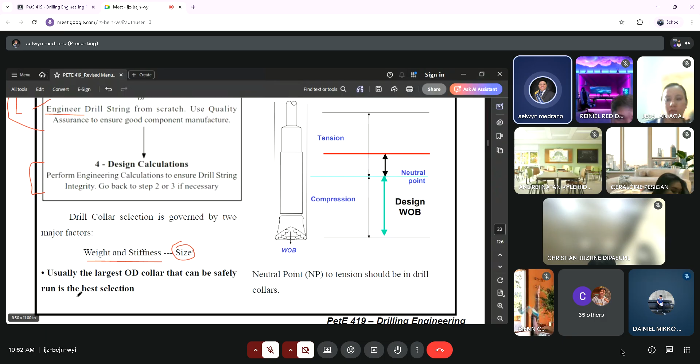So drill collar selection daw po is governed by two major factors. However, you will see here it's three. Tatlo siya, but weight and stiffness are somehow associated with one another. Then the other one is the size. So usually, the largest outside diameter collar that can be safely run is the best selection. So yung pinakamalaki na possible. Kasi there would be more available weight on bit. So mas mataas yung weight on bit, mas mataas yung ina-exert na force due to gravitational pull. So mas mataas yung ma-expect nating rate of penetration.

So we will be expecting lesser energy output from the equipment, kasi napoprovide na yung force or energy na kailangan natin para mag-penetrate yung ating bit by the weight na pinaprovide ng ating drill collar.

Siyempre, pag taas ng diameter, at most cases, tataas din yung thickness niya or mas makapal yung thickness. Mas makapal yung body ng mismong drill collar. Tendency, mas mabigat, kasi it's composed of more materials. And also, greater stiffness to resist buckling and smooth directional tendency. Also, cyclical movement is restricted due to tighter clearances.

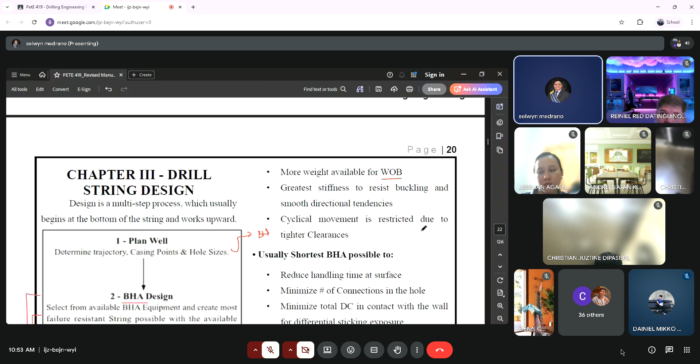Usually, when we use the shortest BHA possible, yung nangyayari is there would be a reduced handling time at the surface. Also, nami-minimize din yung number of connections sa hole, as well as the minimized number of the total drill collar in contact with the wall. So technically nababawasan natin yung tendency ng differential sticking, since mababawasan yung total number of drill collar natin. Okay? Gets po yun.

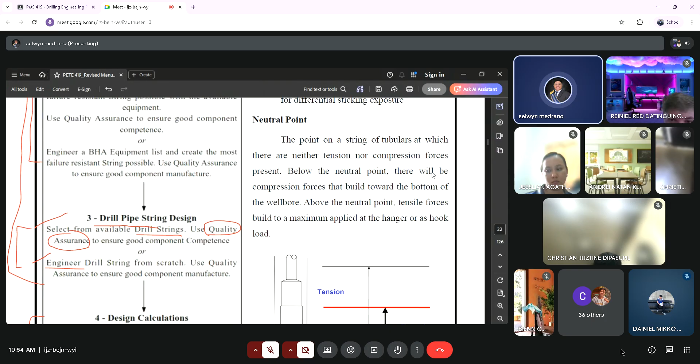Gets. Can we proceed now with the next concept to be discussed, which is the neutral point. Okay, for the neutral point, by definition, the neutral point is the point on a string of tubulars at which there are neither tension nor compression forces. So if we are to look at this figure, as you can see, this is our BHA, as a part of the drill string.

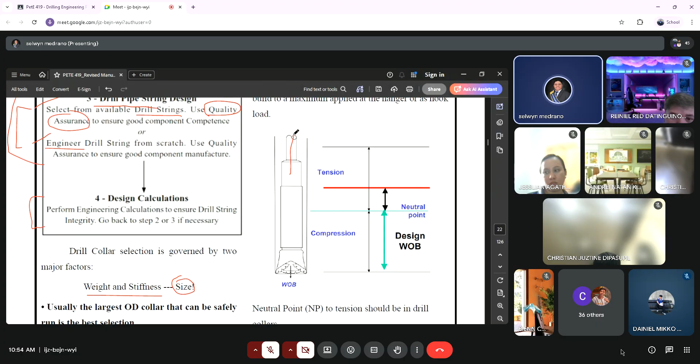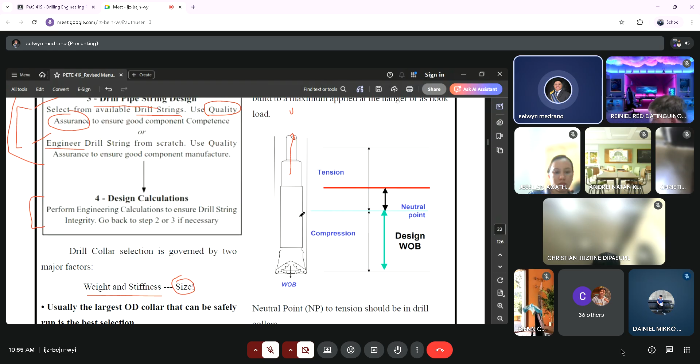Normally yung tension po is nararanasan siya dito sa upper part kasi naka-hook siya doon sa top drive. So, ang tendency, there would be a tensile force or yung tension natin. Then, yung compression, it will be caused by the gravitational pull or yung weight ng ating whole assembly. So, ang tendency, there would be a point between the tension and the compression wherein neither is present.

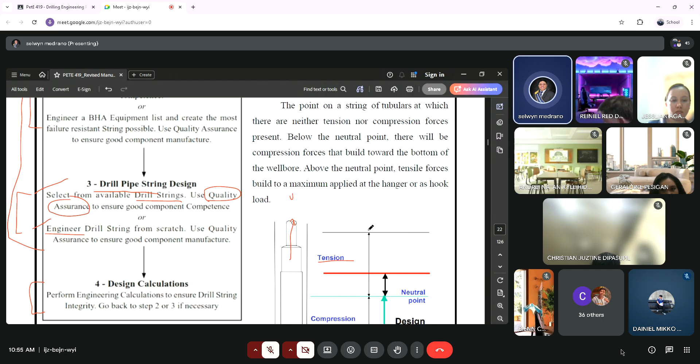Walang tension, walang compression. So in terms of the value of forces, it is 0. So at equilibrium siya. Pero yung term natin for this one, sa drill string, is neutral point.

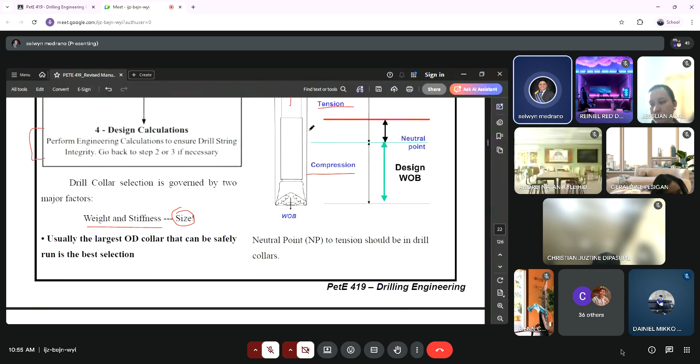So we have two types of neutral point. We have the neutral point of tension and compression, yun yung mas general na sinasabi natin kanina, and we have the neutral point of bending. So if NPTC is pertaining to the point within a tube where the sum of the axial forces is equal to 0, ang neutral point of bending naman is pertaining to the sum of moments. Sa halip na axial force, this is pertaining to moments. So same lang na at equilibrium or at 0.

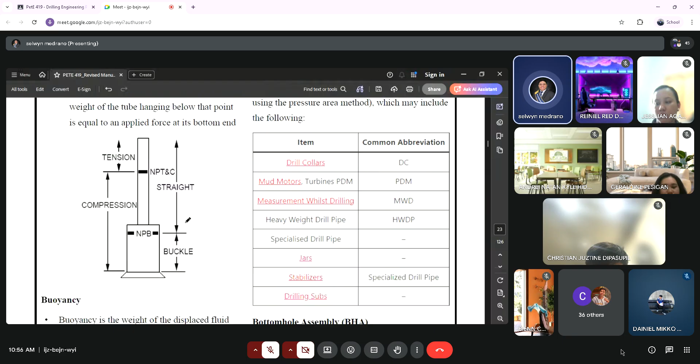Gets po yung difference ng NPB at NPTC? Gets? Okay. Ito yung itsura niya. It's more of the straight section which experiences the straight applied force, and where the section buckles up. Doon nagkakaroon ng bending sa gitna or between those two. So, technically, NPB is somewhere between the straight section and the buckled section.

Okay. So, next we will be dealing with buoyancy. I think you have already encountered this during your drilling technology last year, yung buoyancy as a concept in drilling. So, buoyancy, by general definition, is the weight of the displaced fluid. Buoyancy is usually accounted for via BF or the buoyancy factor. This is for the case of buoyancy as a concept under drilling engineering.

In the setup of a borehole, buoyancy is creating a hydrostatic effect. Pag sabi hydrostatic effect, it's more of hydrostatic pressure, knowing that pressure is force over area. So technically, nagkakaroon tayo ng hydrostatic effect kasi there is a presence of drilling mud along with our drill string. So the hydrostatic effect is due to the presence of mud.

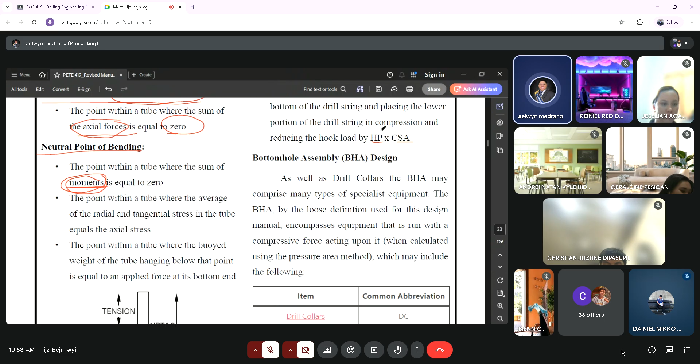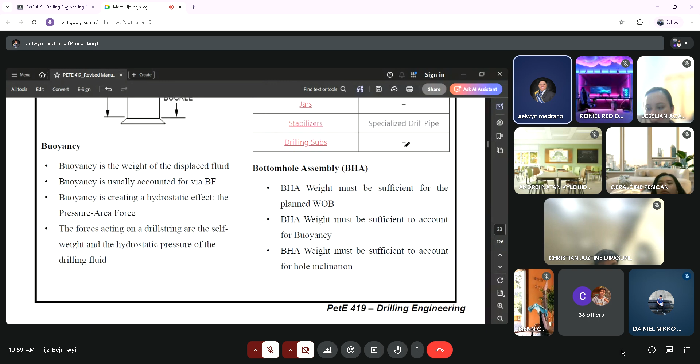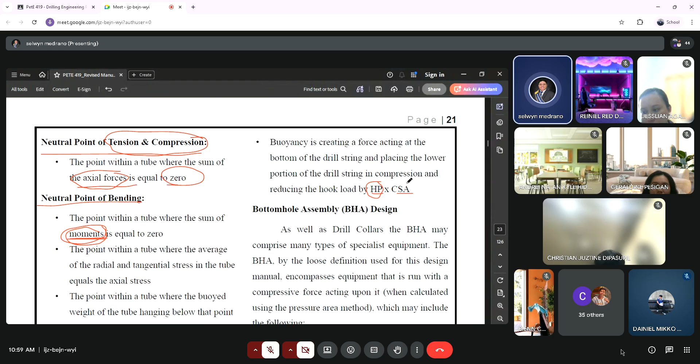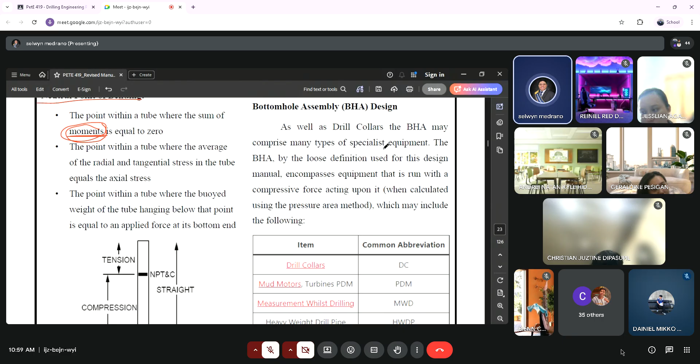For BHA design or bottom hole assembly design, let's first identify the equipments or components of a BHA. So we have here this list of items.

You have the drill collar, abbreviated as DC, the mud motor, which is PDM, pertaining to positive displacement mud motor. Then MWD, or measurement while drilling.

HWDP, or the heavyweight drill pipe. We also have the specialized drill pipe, though there is no specific common abbreviation for such.

Then we also have the stabilizer. From the term stabilizer, it stabilizes the drill string to the point that it won't stick or have contact with our borehole wall or casing. Because the tendency is there could be a differential in pressure between the two surfaces, and once there is a large difference in pressure, the tendency is for the two to stick together. To achieve equilibrium, we need equivalent pressures at both surfaces.

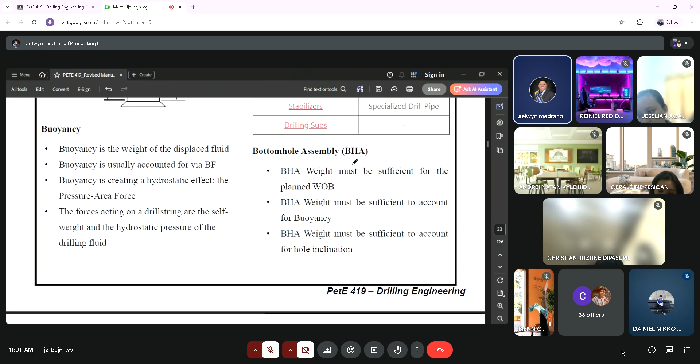Next, we have the BHA. For the BHA weight, it must be sufficient for the planned weight on bit. So what do we call weight on bit? That's the expected weight we want the bit to exert in order for it to achieve a specific value of rate of penetration. This means we quantify the rate of penetration earlier in planning, before we apply weight on bit, because our design is based on the expected weight on bit that our drill string will exert.

BHA weight must also be sufficient to account for buoyancy, because it shouldn't float in the drilling mud. If it floats, the tendency is it cannot drill properly, it won't continuously penetrate the formation.

BHA weight must also be sufficient to account for the hole inclination. So if our well is deviated, our BHA must be accounted for. This is where calculations come in that will be used in Chapter 5 on directional drilling, dealing with BHA accounting for hole inclination since that's about directional drilling or inclination of the well.

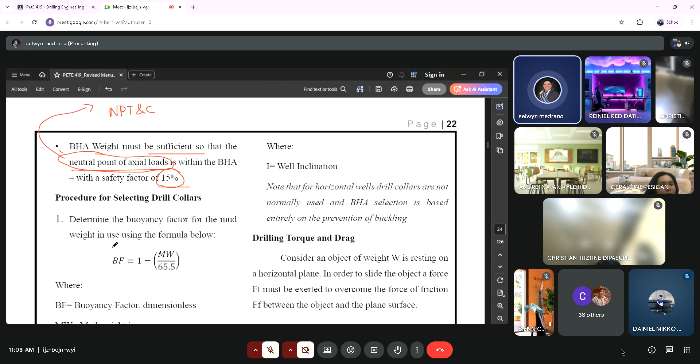So for the procedure of selecting drill collars, first we need to identify or quantify the value of the buoyancy factor. Buoyancy factor is given by this formula, and it's determined only by one parameter, specifically our mud weight, which must be in ppg, or pounds per gallon.

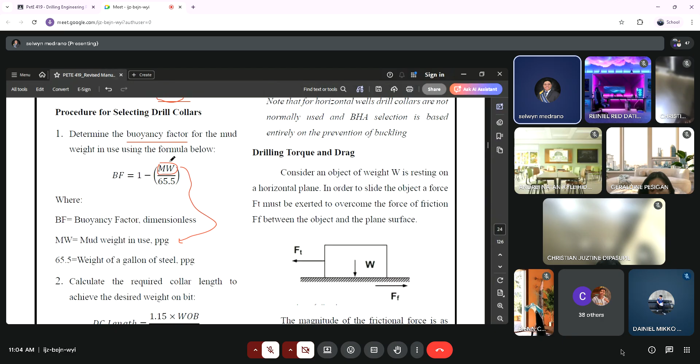There is an equalizing factor, not exactly a conversion factor, wherein we use the weight of a gallon of steel, which is 65.5 ppg, pounds per gallon. So our buoyancy factor value is normally less than 1. It won't be equal to 1, because if it equals 1, that would mean the mud weight is zero, meaning there's no weight being exerted by the mud, which is very impossible. So our buoyancy factor will always be less than 1.

Next is to calculate the required collar length to achieve the desired weight on bit. For that, we'll account for the 15% safety factor mentioned earlier, so we multiply by 1.15. For the drill collar length, the formula is the weight on bit all over the buoyancy factor times the weight of the drilling collar.

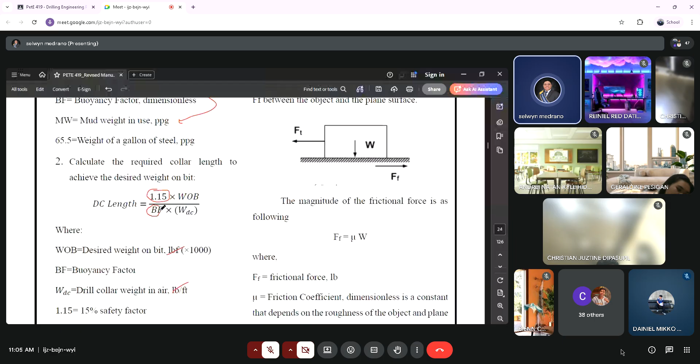This is the weight of the drill collar in air, expressed in pounds per foot. So in the numerator we have pound force, multiplied by 1,000, all over the denominator which is pound force per foot. By unit analysis, we'll end up with feet as our unit, since the pound force cancels out. The buoyancy factor is dimensionless, and the same goes for the constant 1.15 since that's just for the safety factor. So that's a simple calculation for the drill collar length.

However, in terms of a deviated well, of course there is an inclination to consider.

So nag-iiba yung length niya na expected natin. So we'll be accounting for the cosine of the inclination for that. So we have the DC length - this is the vertical length na compute po natin from here. Then we divide it by cosine inclination or the inclination cosine. Okay, so we'll have the length in deviated. So expected that the computed DC deviated length is greater than DC vertical length.

Kasi if the case is equal lang po sila, ibig sabihin vertical yung ating well. So if the case po, ulitin ko ha, if the case equal po ang DC vertical length at ang DC deviated well, technically it's not deviated. So vertical po siya. Kasi if the inclination is 0, ano ba ang cosine 0? Cosine 0 is 1. Makakancel lang siya. So technically equal siya. Walang inclination. So vertical lang po talaga yung ating well. Nakukuha po. Nakukuha ga. May kausap pa ba ako?

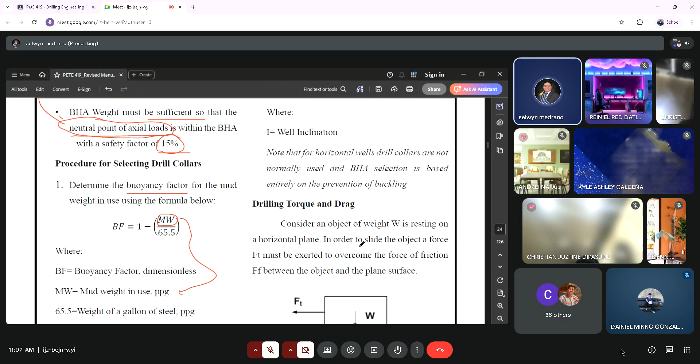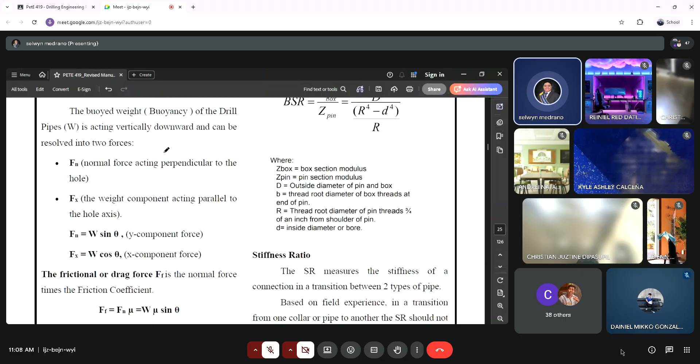Okay, so we proceed now with the drilling torque and drag. Actually, in terms of this, we'll be dealing with it on the directional drilling in chapter 5. So let's leave it there kasi this is more of an application siya sa deviated wells. So nag-iba kasi siya once there's an inclination. So we'll be focusing this as well as the drag force in chapter 5.

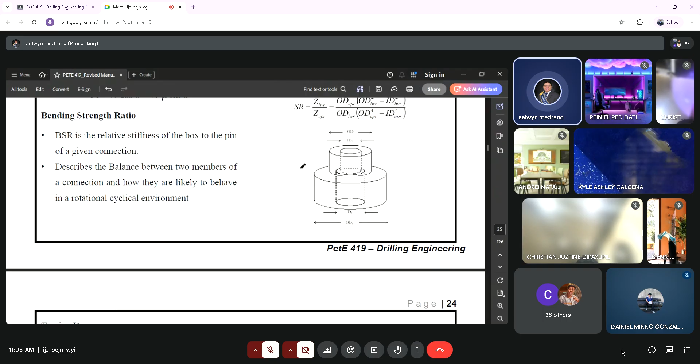Now, so let's focus here at the bending strength ratio or the BSR. So BSR or the bending strength ratio is the relative stiffness of the box to the pin of a given connection. So for a connection, we have two components na kinoconnect. We have the box and we have the pin. Pag sinabing box, that is the female thread form. Ang pin naman po, siya yung male thread form. So by the definition, you can already see the difference between the two.

So, di ba yung component niya is yung thread, alam niyo ba yung threaded form? Para siya yung sa part ng tornilyo at sa bolts and nuts. Yan, yung parang ganun yung tsura niya. Yung bolts, siya yung nagsisilbing male thread form. Yung nuts, siya yung nagsisilbing female thread form. Bolts and nuts. If tama, bolts and nuts. Ayan ba ang bolts? Yung pahaba ba? Yung pahaba ang bolts. Tapos yung nuts yung iniikot. So parang same lang yung analogy niya with the drill string.

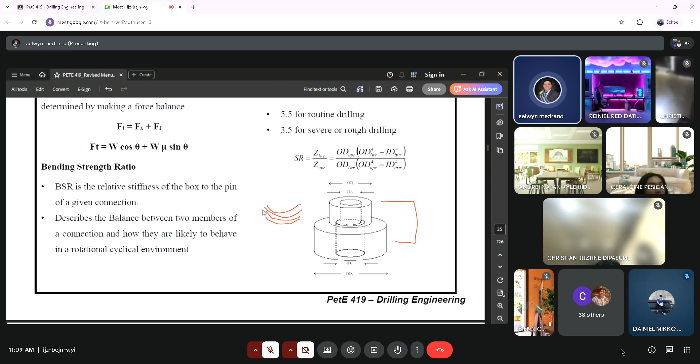D. No. So yung D natin is the outside diameter ng pin at box. So normally they are the same. B natin, in terms of this is the B, that's pertaining to the thread root diameter of the box threads at the end of the pin. Then R po natin, this R here, are the thread root diameter of pin threads 3/4 of an inch from shoulder of the pin. And D natin, ito, that is pertaining naman to our inside diameter or the bore.

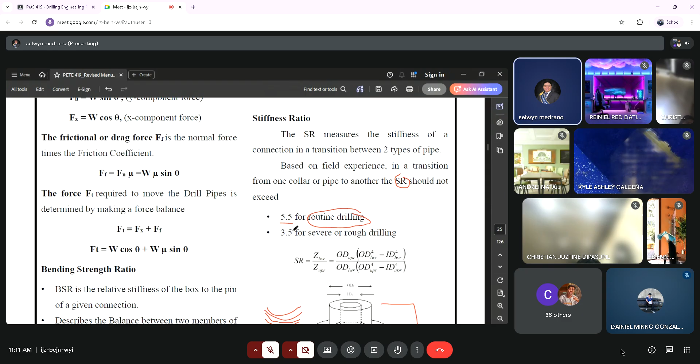Okay? Then along with the bending strength ratio, we also have the stiffness ratio. Now, so for the stiffness ratio, this could be a measure of the stiffness of a connection in a transition between two types of pipe. So based on the field experience in a transition from one type of pipe to another, the stiffness ratio should not exceed 5.5 if we are doing routine drilling, 3.5 naman for severe or rough drilling. Okay, so these are the limitations of the values. So this is based on field experiences. So technically, we have kumbaga live testimonies for such in terms of the possible values natin for the stiffness ratio.

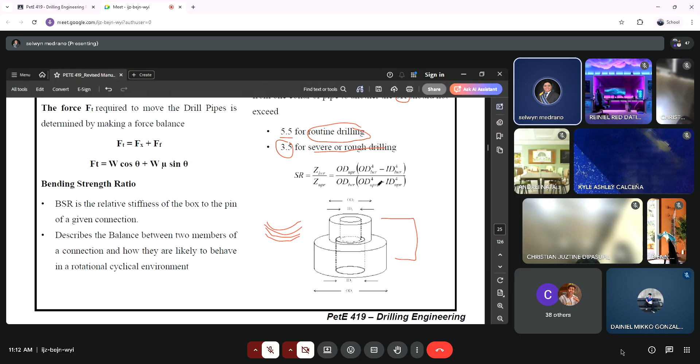So stiffness ratio daw po is computed as the Z of the lower, that's pertaining to the modulus ng lower section, all over the modulus of the upper section. Or it could be rewritten as the outside diameter of the upper multiplied to the difference ng fourth power for the lower outside diameter and the inside diameter of the lower section, all over OD ng lower section or the outside diameter ng lower section multiplied to the difference ng outside diameter ng upper section na naka-raise to 4 and also for the inside diameter of the upper na naka-raise din sa 4. So ito lang naman yung more of direct substitution lang po for such.

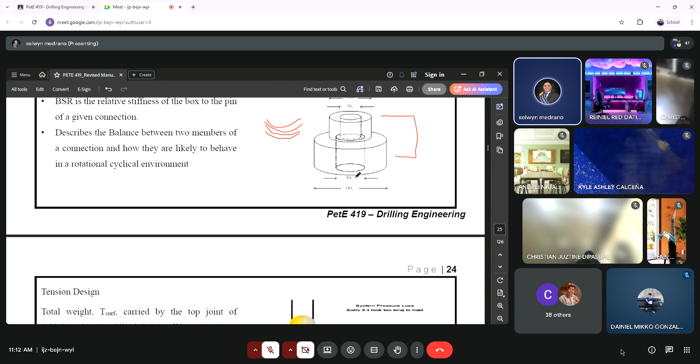Question at this juncture. May questions po? So clear pa naman yung ating mga nagiging discussions since this is more of concept pa lang.

Questions? None? I assume you don't have any question based on the fact that you're not raising your hand.

So next we have the tension design. For tension design, we have the total weight, quantified as T sub surf equals the product of the length of the drill pipe multiplied by the weight of the drill pipe, expressed in weight per unit length. When you multiply these, say weight is pound per foot and length is in foot, the foot unit cancels out, leaving pound or weight. Plus the length of the drill collar times the weight of the drill collar. You just add these, then multiply by the buoyancy factor. It's direct substitution.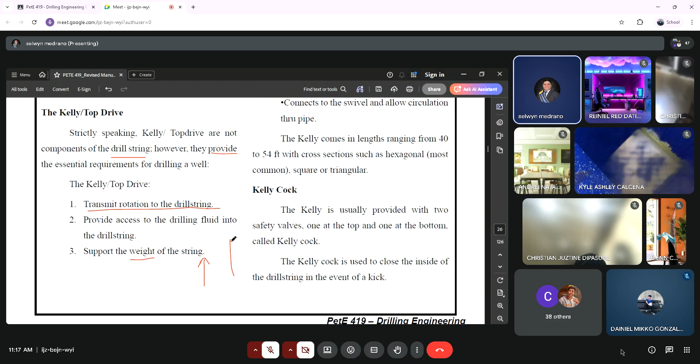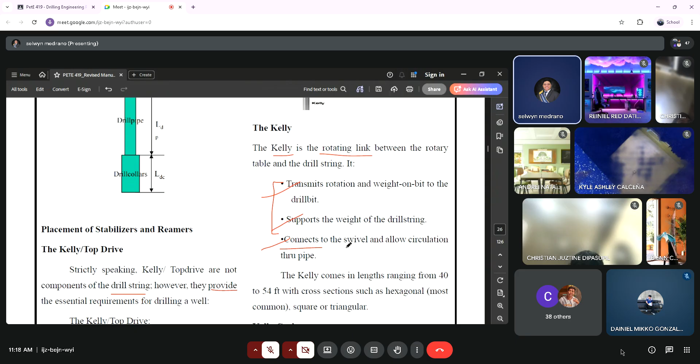The Kelly or the top drive transmits rotation to the drill string, so the whole drill string rotates due to the presence of the Kelly and the top drive. It also provides access for drilling fluid into the drill string, serving as a channel between the fluid and the string. It also supports the weight of the string—meaning tension or tensile stress is exerted there, not that it pulls the drill string so it doesn't fall. So tension is present at that point. By definition, the Kelly is the rotating link between the rotary table and the drill string—essentially the same as the first two points. It also connects to the swivel and allows circulation of the drilling mud through the pipe.

In terms of its cross-section, how it looks, the Kelly's cross-section is normally hexagonal, since that's the most common, but it could also be square or triangular.

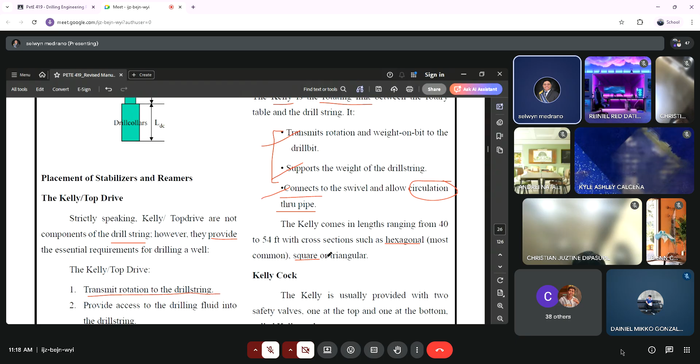We also have the Kelly cock. The Kelly cock is used to close the inside of the drill string in the event of a kick—once there is an intrusion of reservoir fluids into the borehole, we initiate the use of the Kelly cock to close off the inside of the drill string. The upper and lower Kelly cocks operate manually.

The IBOP, or internal blowout preventer, and the DPSV, the drill pipe safety valve, are not run in the drill string but kept handy on the rig floor. This is a picture of a Kelly cock.

By definition also, we have another definition for the top drive.

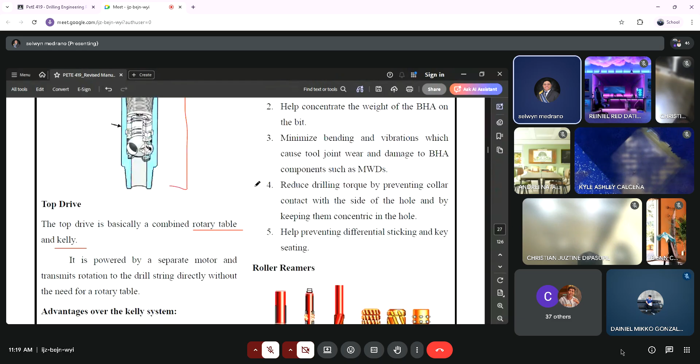Top drive daw is basically the combination of the rotary table and a Kelly. Kaya somehow Kelly and top drive is associated with one another, no? Upon earlier discussion. So advantage daw po over a Kelly system is that it is more efficient in reaming and back reaming. So pag sabing reaming, it's more of enlarging our borehole, no? And also it's circulating while running in the hole or pulling out of the hole in stands. So ma-maintain niya yung circulation.

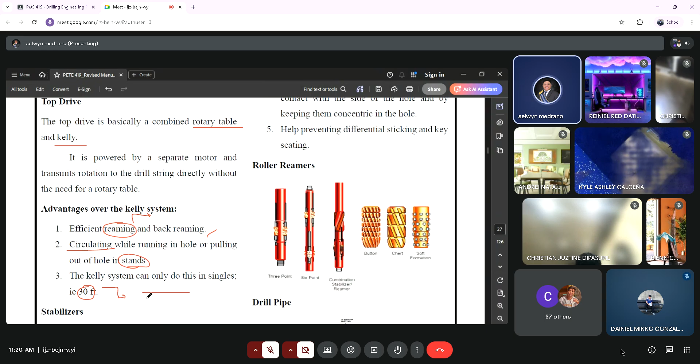As well as the Kelly system can only do this in the single. For example, for every 30 feet. Di ba, every 30 feet, that's pertaining to one standard length of a drill pipe. So, yun yung ibig sabihin niya.

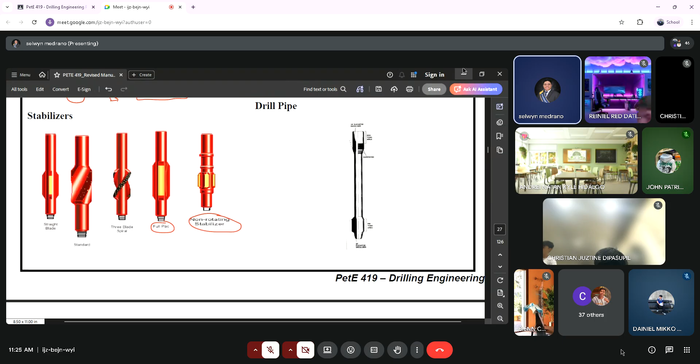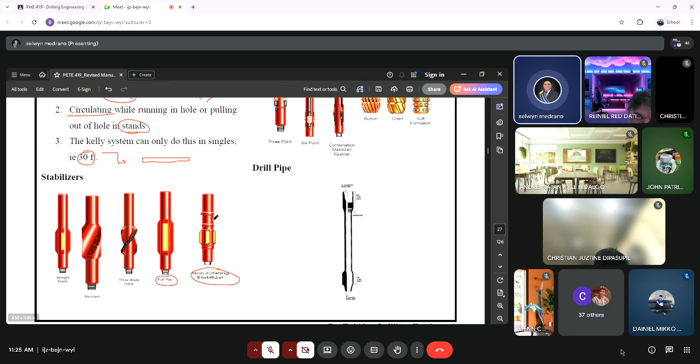So, reasons for using these stabilizers. First po, they are used as a fundamental method of controlling the directional behavior of most bottom hole assemblies. It also helps concentrate the weight of the BHA on the bit. So this is pertaining to our weight on bit. It also minimizes the bending and vibration, kagaya ng sabi kanina ni Nathan. So it's more of a general. So in terms naman of the torsional mechanism, it's more of dito sa 3-blade at standard.

Then it also reduces the drilling torque by preventing collar contact. And it also helps with differential pipe sticking and key seating. So this key seating, if you listened during our syllabus discussion, this is one of the borehole problems na na-encounter natin. Yung key seats. So this is more of changes in the diameter of the borehole due to collapse.

Okay, we also have here the roller reamers. So ganito po yung itsura ng roller reamers. So it's subdivided into 3 types: the 3-point, 6-point, and the combination of a stabilizer and a reamer. So merong ganyan.

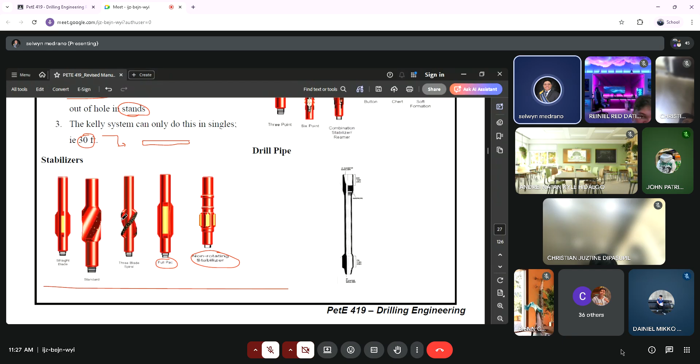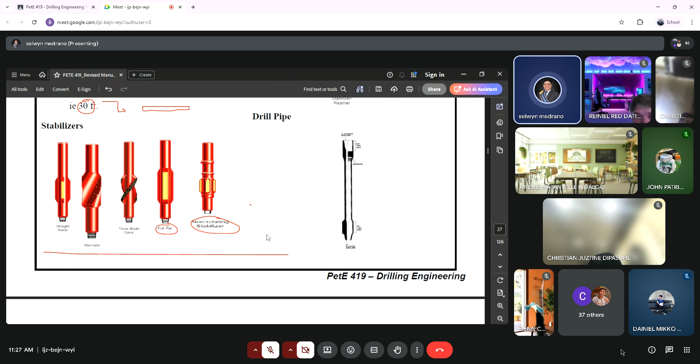So if I'm not mistaken, meron din tayong napuntahan doon na company that is specializing naman sa mga casings. Kita niyo yung itsura ng casing, di ba. So you have already the idea kasi you've had already the opportunity to see those, but that was last year first semester if I'm not mistaken. Pero feel ko na may natatandaan pa kayo.

Okay, next we have the drill pipe. For the drill pipe we have function, yes, Betong. May question si Betong?

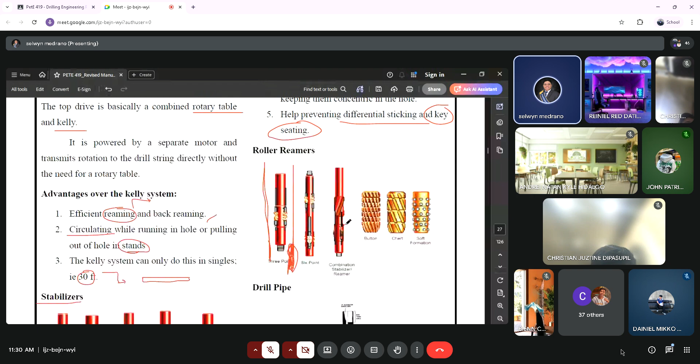Okay, function for drill pipe. So this drill pipe will serve as a conduit or a conductor for drilling fluid. It also transmits rotation from the surface to the bit. From the surface, meaning from the Kelly or the top drive, yung buong top drive system.

Top drive. The components are a seamless tube of forged steel or extruded aluminum, and tool joints attached to each end of the seamless tube. So these tool joints serve as connection for the string. Separate pieces of metal welded to the seamless tube, and thick enough to have a pin or box cut into them. So this pin, ulitin ko, is the male thread form. This box is pertaining to the female thread form. Male at female, literal na babae at lalaki. And I think you're old enough to understand kung bakit siya tinawag na male at female.

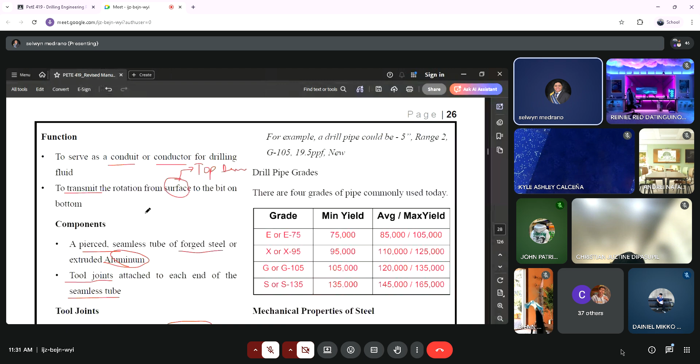Next, we also have drill pipe classification. It can be classified into sizes, lengths, grade, weight, and also into class. For sizes, it's in terms of the diameter, referring to the outside diameter. Length, we have discussed already range 1, range 2, and range 3. Di ba? Then we have the grade.

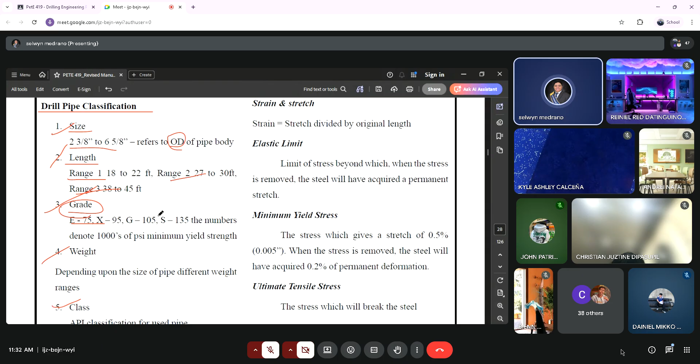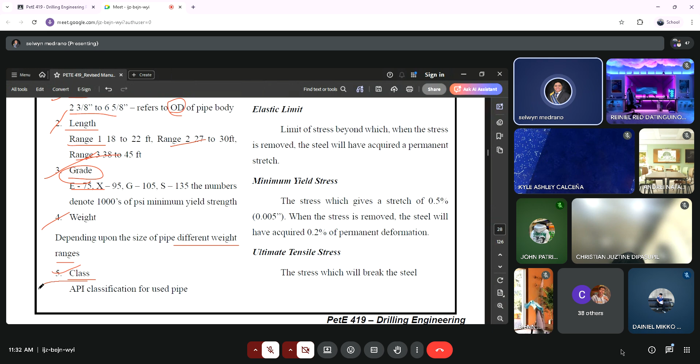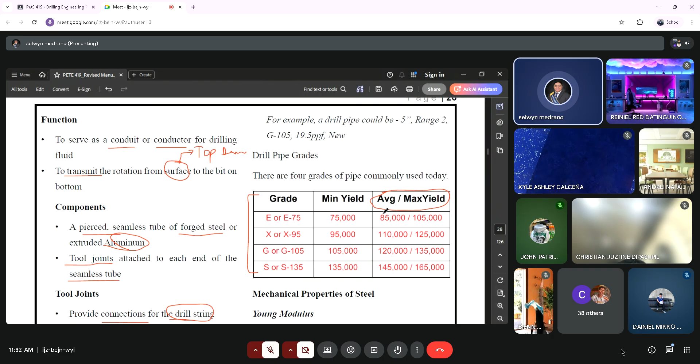Grade is pertaining to the minimum yield stress or minimum yield strength na kaya niyang i-absorb. Then weight, different weight ranges depending on the thickness. Then classes in terms of the API classification. For grade, this is just a recall. Apat lang to pero mas kompleto yung previous natin ginamit, di ba? Actually, there is additional information here wherein yung average and maximum yield is na-quantify natin. So, i-take note of this.

For the mechanical properties of the steel, we have the Young's modulus. Young's modulus, stress over strain lang. This is just like physics, fundamentals of deformable bodies. I'm sure that you have already encountered these concepts. We also have the stress and the strength. This stress is pertaining to the pressure. The strength is pertaining to force. If you could remember, pressure is force over area. Kaya the formula for this one is strength divided by the cross-sectional area. So same lang siya: pressure is equal to force over area.

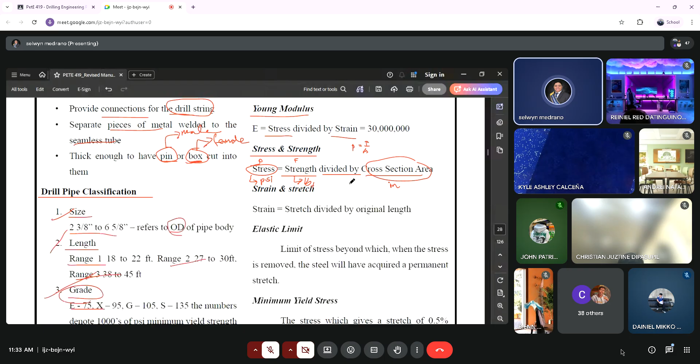Kaya if you could notice, ang stress natin, unit niya is PSI. Then ang strength natin is pound force. So yan po. And this one, normally this is in inch square, para siya ay maging PSI or pound force per square inch. Then we have the strain and stretch. Yung difference niya is based on this equation.

So we have a stretch. When the stretch is allocated or accounted with the original length, that's pertaining to strain. So stretch is yung elongation. Yan yung term natin, elongation. Nagkaroon ng elongation. Tapos if we account for the original length, that's pertaining naman to the strain.

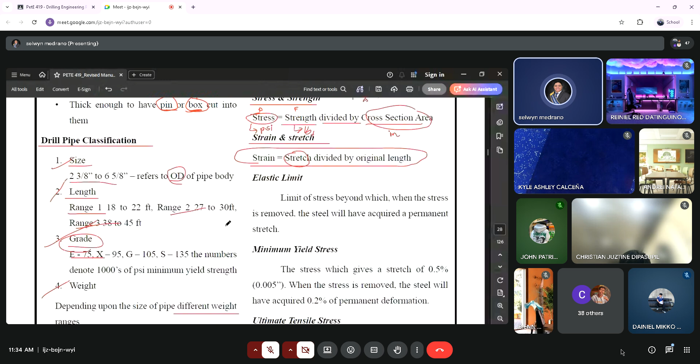Okay, for this elastic limit, that's the limit of the stress beyond which, when the stress is removed, the steel will have acquired a permanent stretch. So when nag-exceed tayo sa elastic limit, di na siya babalik sa normal. Di na siya babalik sa dati.

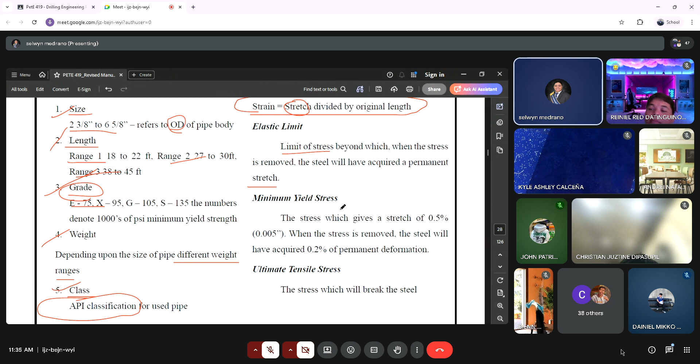Okay, we have the minimum yield stress. So for minimum yield stress, this is the stress which gives a stretch. Sorry, can't pronounce it right. The stretch of 0.5%, or that's pertaining to 0.005 inch. So when the stress is removed, the steel will have acquired 0.2% of permanent deformation.

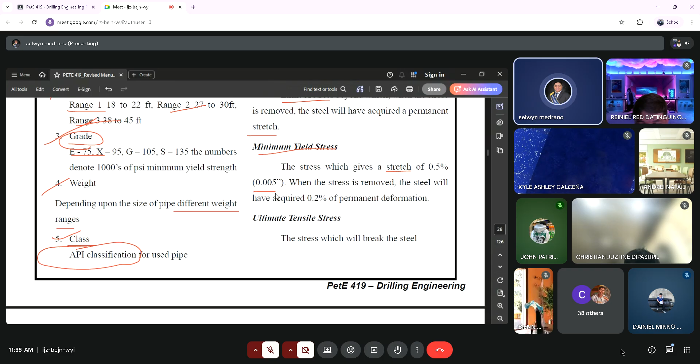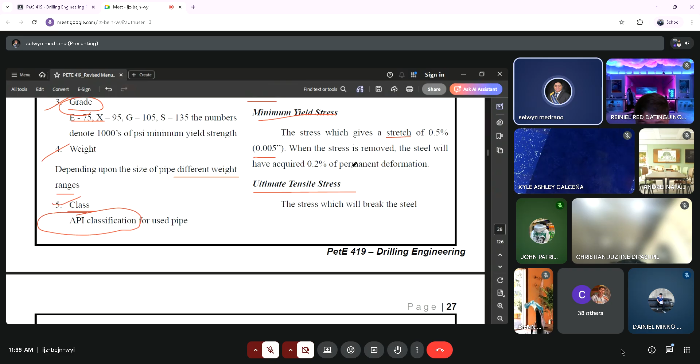Next, we have the UTS, understanding the self. Joke lang. This is the ultimate tensile stress. This is the stress which will break the steel. Okay.

Let's deal naman with drill pipe upsets. So, ano yung different types ng drill pipe upsets? So, in terms of upsets in the drill pipe, that's pertaining to the changes of diameter, may it be internal or inside diameter or outside diameter. Okay. So, let's have the first example. We have the internal upset. Sa internal upset, same lang ang OD or the outside diameter. However, there is a slight change in the internal or inside diameter.

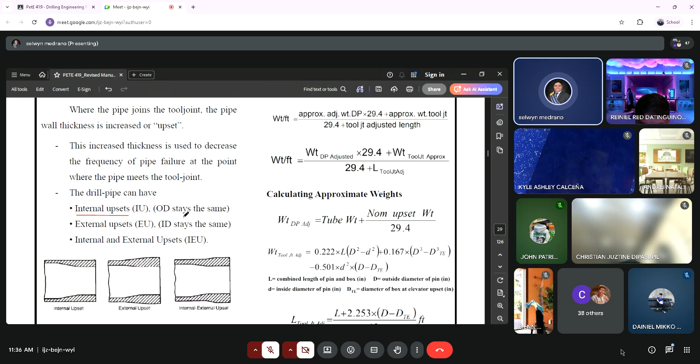So as you can see, this is an example of inside upset. So same lang yung OD, pero nagkaroon ng slight changes doon sa ID or sa inside diameter. Pwedeng mas lumaki ang inside diameter or mas lumiit. Okay? Or in terms of the thickness, mas lumiit or mas lumaki.

So, external upset naman, same lang yung ID. So, this is not an example. Dapat siya ay straight na ganyan eh. Same ang ID, however, the outside diameter is not the same. So, dapat straight to. Same daw yung ID at all sections or at all parts. But the OD or the outside diameter is not the same. There could be changes. It could be reduction or an addition of outside diameter.

Next, we have the last one, which is the mixture or combination of two, the internal and external upset. So same na nagkaroon ng changes. This is pertaining to drill pipes. Ha? Question.

Next, we'll be dealing naman with 4 different types or 4 different specifications of drill pipe weights. So we have here 4. First one is the plain end weight. This is referring to the weight per foot of a pipe body. Simple as that. Literal na weight per foot lang nung pipe body.

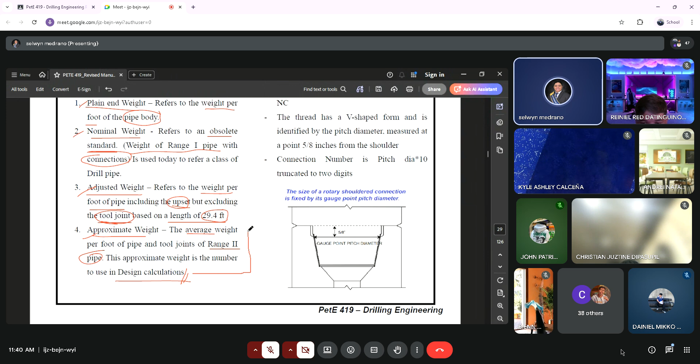Next is the approximate weight. Approximate weight naman is pertaining to the average weight per foot of pipe and tool joints of range 2 pipes. This is a specific example. This approximate weight is the number used in design calculation. So, these are the values of the weight na in-incorporate natin or in-associate natin with the design calculation, o yung fourth section of designing the drill string. Okay, so sa design calculation, upon using engineering standards, we will be considering its approximate weights. Okay po.

Okay, so for calculating the approximate weights, we have this formula. So we have the approximate adjusted weight of the drill pipe. We multiply it by 29.4. We add the approximate weight of the tool joint, all over 29.4 plus the tool joint's adjusted length. So technically, that's weight per foot. So in terms of the oil and gas industry, we'll be using pound force per foot.

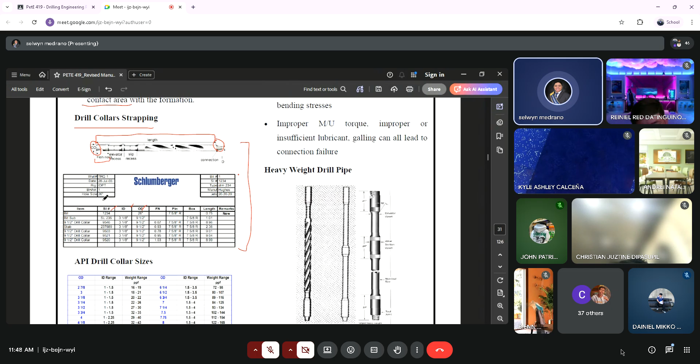Okay? So yan. SI number, that's more of sa nomenclature lang. Then we have the API, the collar sizes. Yan, ito yung mga ranges niya. Diba we have a specification for drill pipes and casing. So we have for drill collar as well, but it is more of in ranges siya. Depending din siya sa weight niya.

So drill collar connections are rotary shouldered connections and can mate the various drill pipe connections. So pwedeng magkaroon ng hybrid in terms of the component. Pwedeng drill pipe, drill collar. So normally before magkaroon ng transition from drill pipe papunta drill collar, gumagamit ng heavyweight drill pipe para hindi magkaroon ng abrupt change in the yield strength. So tendency kapag nagkaroon ng abrupt change in the yield strength, possible na magkaroon ng buckling.

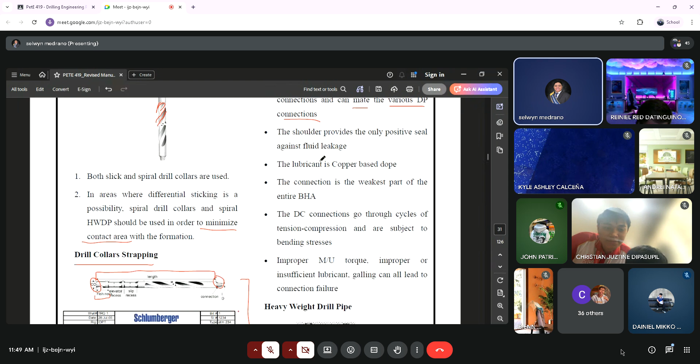So for heavyweight drill pipe, it has a heavier wall, longer tool joints. And it is also available in spiral designs para ma-minimize yung contact area with the formation or with the casing. So function ng ating HWDP: it is used in transition zones between drill collar and drill pipe. Hindi pwedeng drill collar tas diretso drill pipe, so para maiwasan yung buckling, since the heavyweight drill pipe is a specialized type of drill pipe na malaki yung weight niya, tas makapal din siya in terms of the thickness. So nagkakaroon ng transition between these parameters.

So this can be used in compression, and it can be also used in directional drilling. So this also keeps the drill pipe in tension. No? So para ma-prevent natin yung changes in the location ng neutral point. Kasi the changes in the neutral point can affect the whole performance ng ating drill string.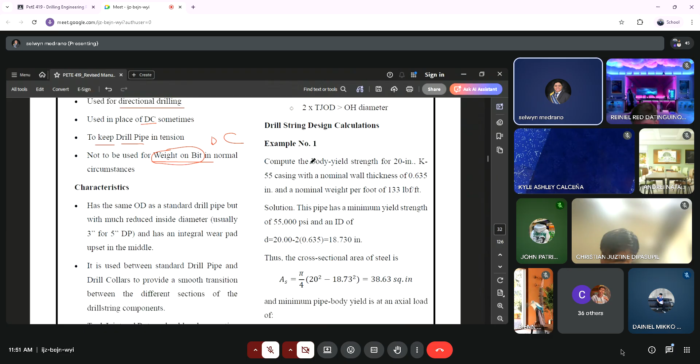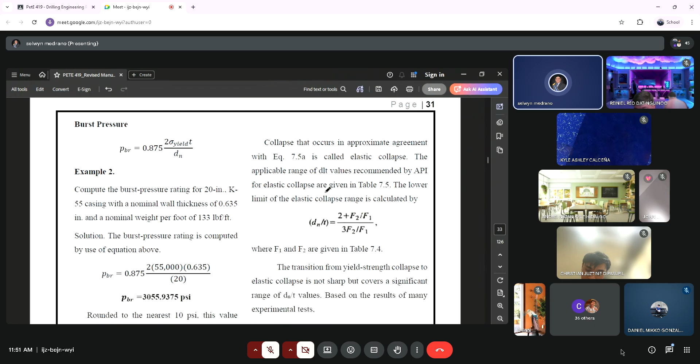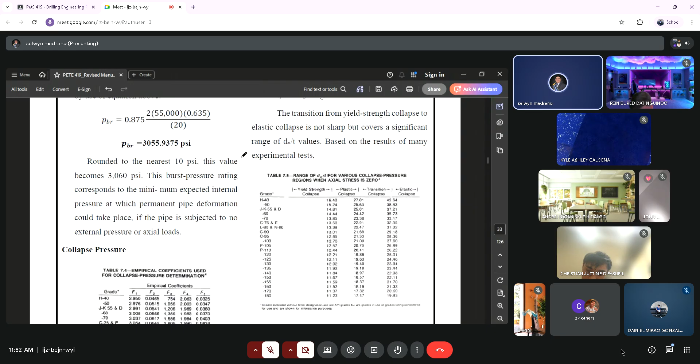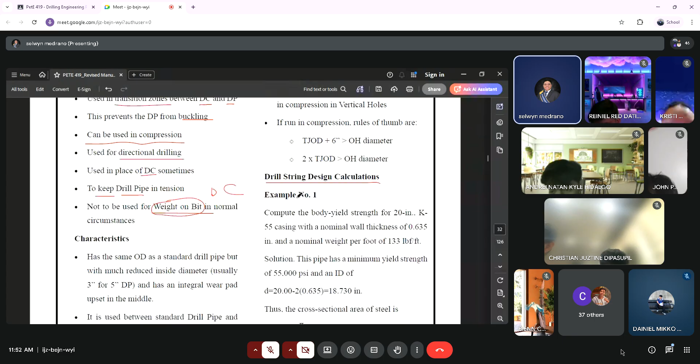So I think that would be all kasi we'll be dealing with the drill string design calculation on our next meeting. And it's already almost 12, no? We still have 9 minutes. We'll be dealing with it on the next meeting. Do you have any questions with regards to what we discussed? So you can review this one, para magiging smooth yung discussion by next meeting. It's understandable kahit basahin nyo lang siya.

So for now, I'll be reminding you with regards to the assessment for the prelim by next week. So you can work it out already with your group mates para makapag-start na tayo ng paggawa ng paper for the case study of the common borehole problems experienced in the oil and gas industry. So do you have any questions?

Yes, Johan. Sir, yung sa presentation po next week, i-shuffle po siya or sunod-sunod na lang po 1 to 11? I-shuffle ko na lang ulit. Okay po. So the presentation will be, I think, Monday or Tuesday. I'll just update you with the exact time. Pero I'll make sure na kayo ay sabay-sabay within that time frame. I'll be limiting the presentation time to 10 minutes kasi ma-defend nyo lang yung title ng topic nyo for the case study.